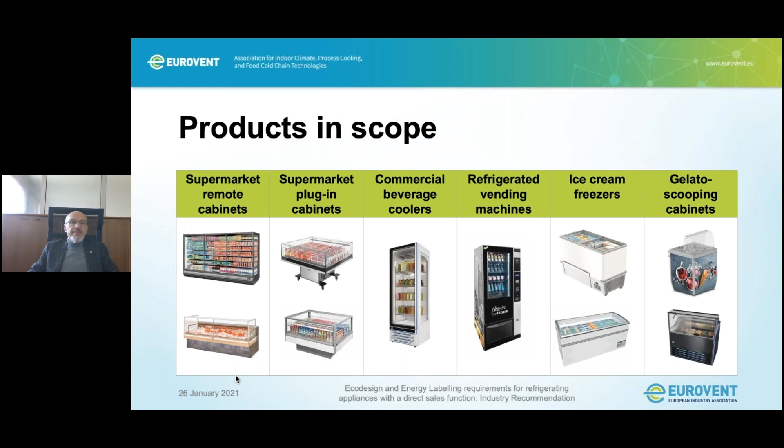How did we come to the requirements? The regulatory process period was very, very long, starting in 2005, so 16 years ago. Since the beginning and during all this long period, this product group has always actively supported the European Commission and its consultants, during the preparatory study that started with product environmental impact analysis and concluded with the proposed energy saving targets. Energy saving, because the main impact for such products is given by the energy consumption during the using phase.

Finally, at the end of 2019, on 5th of December, the two regulations were published. So we had more or less one year of time to align our products to these regulations that will come into effect on 1st of March of this year.

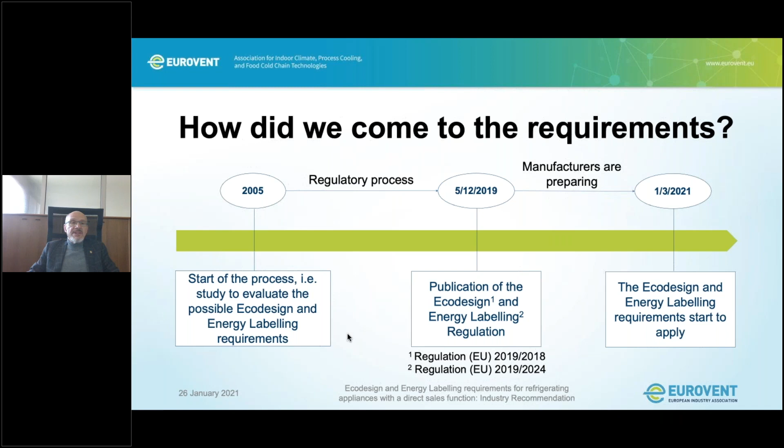Eurovent and its members deem an unambiguous interpretation of the requirements set out in this regulation of fundamental importance. Furthermore, such guidelines could be helpful as industry input for future European Commission guidelines accompanying the regulation. That is what we aim to provide with our recommendation, and this is what you will learn today. So let's start, and please, Francesco, go forward.

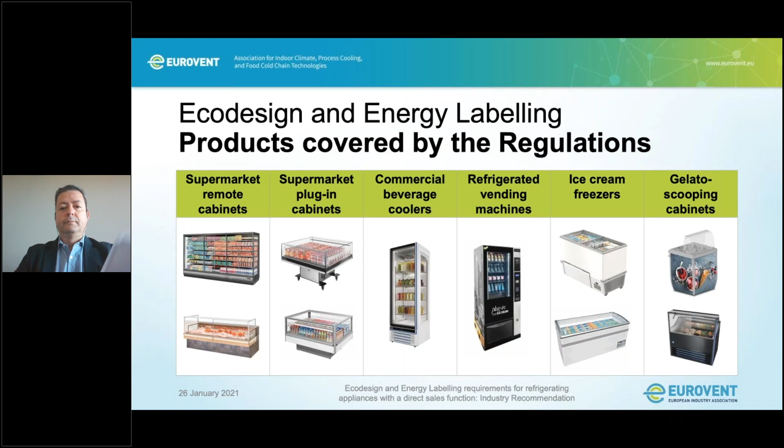The energy labeling and eco-design regulations establish the general rules, principles for refrigerating appliances with direct sales function. Ecodesign states minimum mandatory energy efficiency requirements for the products that will circulate in the European market and their ecological performance. The energy labeling scheme, on the other hand, will highlight the product's energy efficiency and the annual energy consumption with the energy label, with the technical documentation, and with the product information.

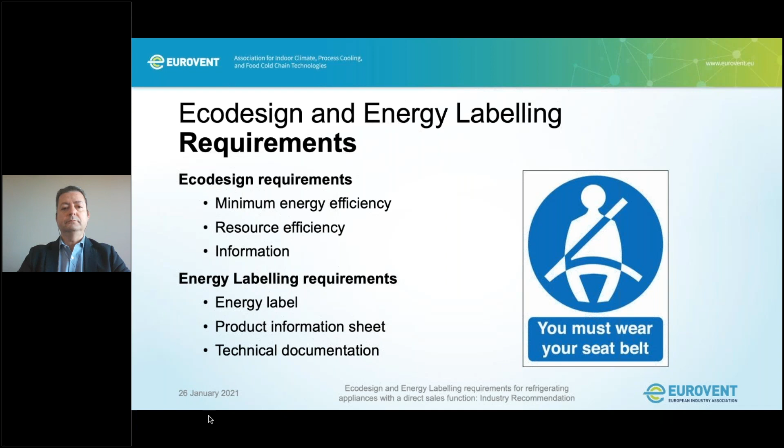The key parameter that determines the compliance and rates the energy performance of the product is the energy efficiency index. This index is the percent index that expresses the annual energy consumption of the product versus the market standard, namely the standard annual energy consumption of that product category.

Each model has its own index that depends on the product model and in a particular configuration, size, geometry, accessories, variants, and so on. Besides Y, the parameter Y, which is the total display area or the internal volume of the product, the other parameters you see, M, N, P, C, are parameters set in the regulation that are required to adapt the general formula to many different product types.

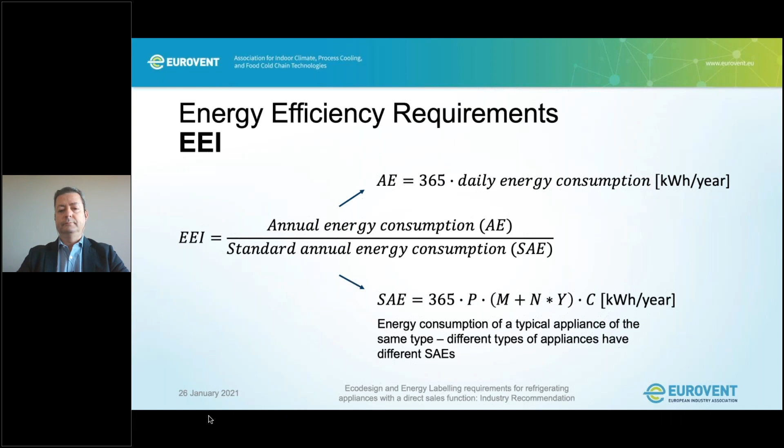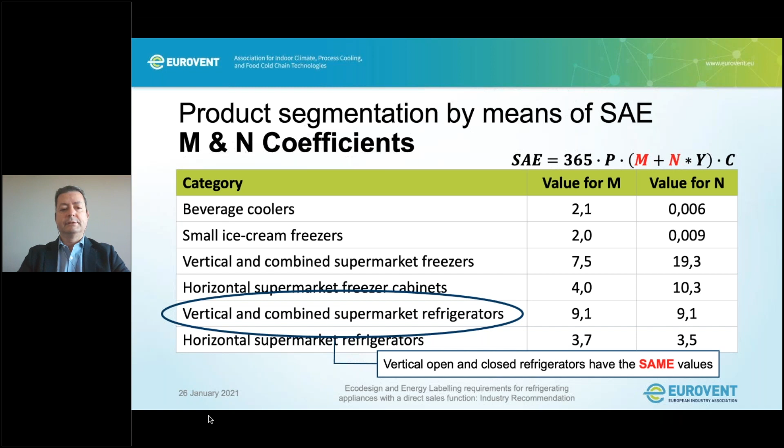M and N are product type parameters. Please notice that vertical, open, and closed refrigerators have the same values to highlight the very different energy efficiency performance of these products. The same applies for vertical and combined supermarket freezers, which have the same M and N parameters.

Looking at the C parameter, this is the product temperature class segmentation parameter. In particular, 3M0 parameters have been introduced with an amendment proposed by Eurovent Association.

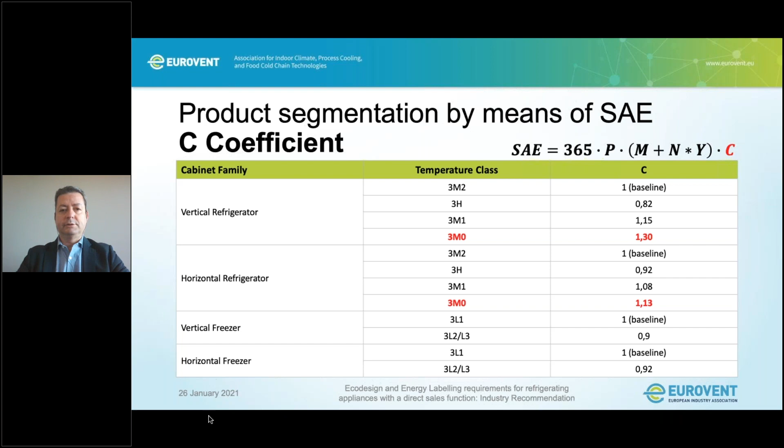Finally, P is the product plug-in or remote segmentation, which is 1 for remote cabinets and 1.1 for plug-in cabinets. For semi-plug-in cabinets, so water loop systems, the right parameter is going to be 1.

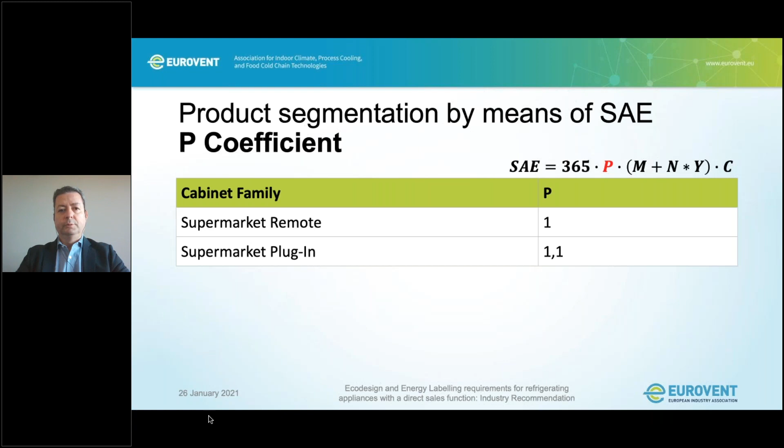As you can see here, the energy efficiency index decides if a product can be sold in the European market or not. In fact, all the refrigeration appliances with direct sales function must have an index below 100 on March 1st this year and below 80 just two years later in September 2023, except for ice cream freezers that will have to be below 80 and then below 50 in September 2023.

These limits apply on products when they're placed on the European market for the first time by the manufacturer or the importer after March 1st this year. Products that do not comply with these limits will be banned, will be prohibited from the European market.

However, products already in the warehouse of dealers, that have been placed in the market by the original manufacturer before March 1st and are now in the warehouse of dealers, can of course also be sold afterwards.

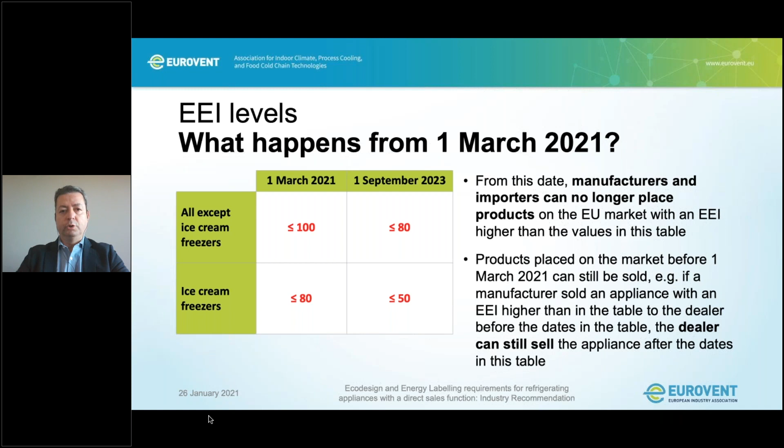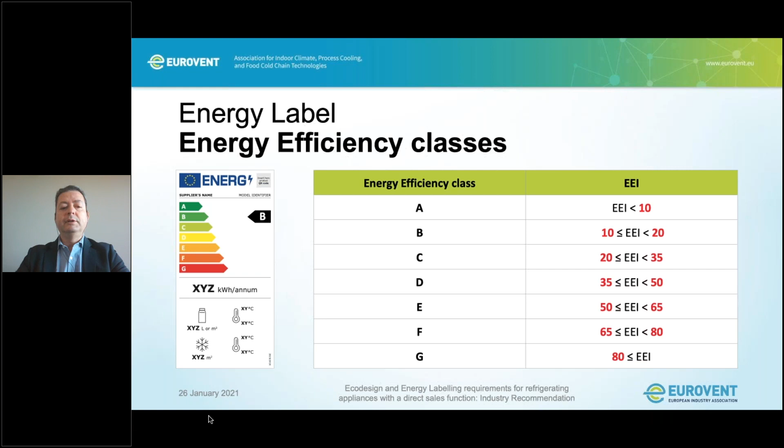As you can see here, the energy efficiency index is also used to decide the energy rating of the product. The end user can finally compare products that apparently look identical, but have very different energy and functional performances. Manufacturers, on the other hand, have now a tool to prove that their products perform better than their competitors. And globally, there is an increase in the average efficiency of the products sold in the European market.

But now, let's have a closer look at the energy labels foreseen for commercial display cabinets, which will be for 3 types.

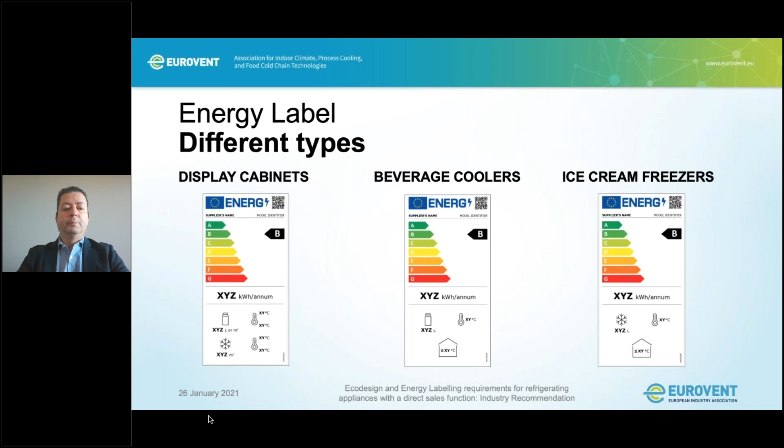The energy label for our supermarket cabinets indicates, first of all, the energy efficiency class in different colors ranging from A to G, from better to worse products. The annual energy consumption expressed in kilowatt-hour per year, and then a few additional informations on the second half and the lower part of the energy label.

We have, for example, the TDA of the product, the total display area surface of the product, and the product temperature on the right side. A product which is M1, we will write -1 + 5, for example.

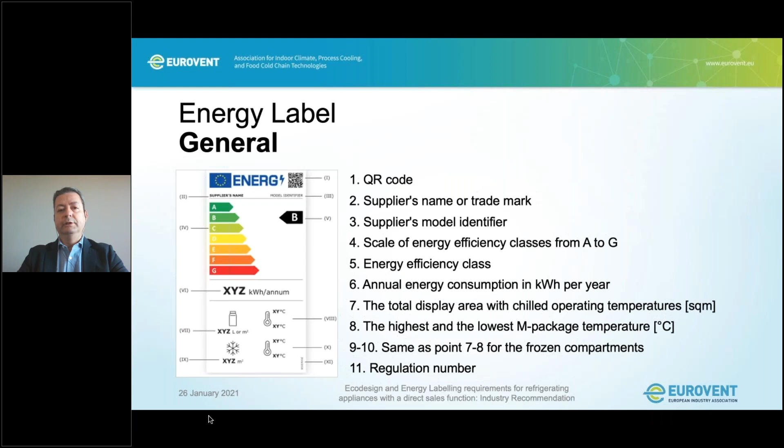The displayed energy consumption tells you how much electricity the product uses in kilowatt hours per year and allows you to compare different models precisely. The lower the figure, the less energy it will use, so saving your money on energy bills. However, actual savings will of course depend on the use you make of the product and how much you pay for your electricity.

In the initial scenario, the A class will be empty due to the extremely high efficiency limits intentionally set by the European Commission. Over time, the A class will be populated with new and better products. In B class, we may find the very best ice cream freezers now.

However, different from other product categories where the energy labeling scheme has been in place for many years, those who buy a commercial display cabinet class C in 2021 should be aware that they are buying the best in its class. In future, innovation will introduce new A and B products available for purchase, pulling the market up. It is very important to explain this concept well, to give our clients the idea of the real value of the products they'll buy.

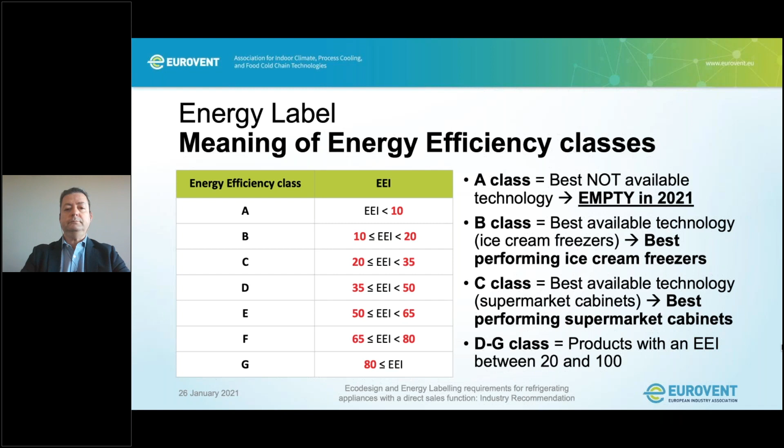So what happens and what changes from March 1st, 2021? If you're a manufacturer, an authorized representative, or an importer in the EU, you need to make sure the energy label is clearly displayed at the point of sale, showrooms, trade fairs, and so on, and that the energy efficiency rating appears on all promotional materials, online sale platforms, commercial offers, and any other marketing document, and of course it must be shipped with the product.

As of March 2021, suppliers—manufacturers, importers, and authorized representatives in the EU—need to register their products in EPREL before placing them on the European market. EPREL is the European Product Register for Energy Labelling. Customers, as well as market surveillance authorities and the Commission, will find all products circulating in the European market registered in EPREL without exception.

There will be two parts in EPREL. One is confidential, where manufacturers will place their test reports, for instance, and one will be the public part. Everyone can access the public part without restriction; you just need to register yourself as a user to enter and see the information. The information in EPREL remains visible until 8 years after the product is phased out from the market. With EPREL, clients will have more information than ever to compare and wisely decide which are the most efficient products for their stores.

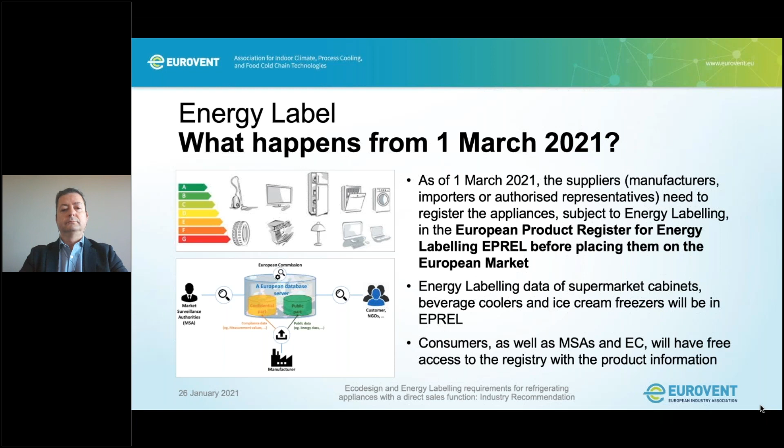The regulations precisely state which products are in scope and which are out of scope. As you can easily understand, the effectiveness of these energy measures directly depends on coverage, and it is essential that all products sold in the European market are labeled. But are really all refrigeration appliances for direct sales function going to be labeled? The answer is nearly yes. In fact, there are exclusions, but they are very limited.

On the left side of the screen are the exclusions from the obligation of energy labeling coming directly from the regulation. For example: saladettes, horizontal serve-over counters with integrated storage designed to work at chilled operating temperatures, corner cabinets, vending machines for frozen food, serve-over fish counters with flaked ice, and refrigeration cabinets for the sale of live foodstuffs like living fish, shellfish, and so on. These are exclusions from labeling foreseen in the regulation.

On the right part, you have the exclusions introduced by the Eurovent document interpretation guide—additional exclusions introduced by Eurovent. These are backwall cabinets, provided they have integrated refrigerated storage; fruit, vegetable, and meat cabinets using high humidification systems; curved cabinets; and carousel cabinets.

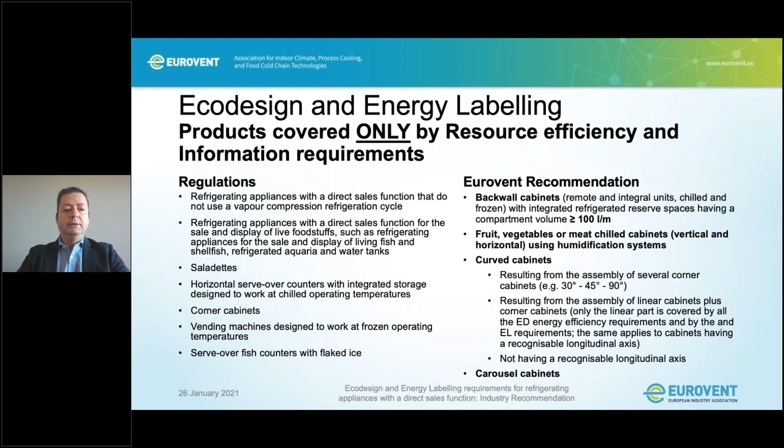Now let me turn the page for a moment and introduce the new concept of circular economy. The circular economy model is essential in the frame of the European Green Deal, whose final goal is to reduce greenhouse gas emissions to become climate neutral in 2050. Circular economy is the opposite of the traditional linear model: take, use, dispose.

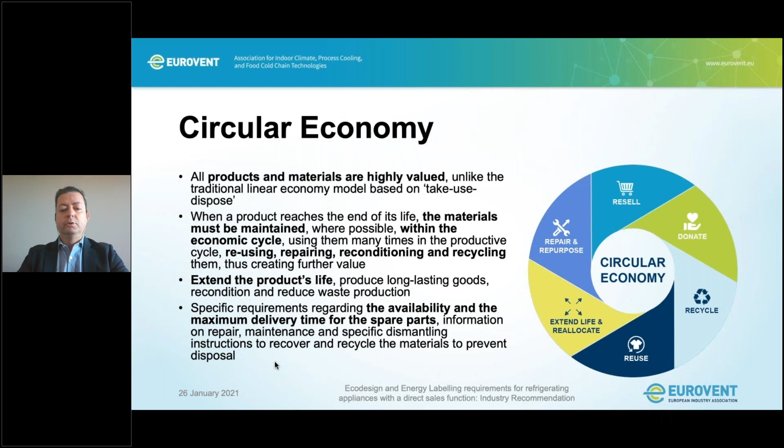All products and materials are highly valued. They must be used many times in the productive cycle—reusing products, repairing, reconditioning, and recycling them, thus creating further value. The point here is to extend the product's life. This results in specific requirements regarding the availability and maximum delivery time for spare parts, information for repair and maintenance, and specific dismantling instructions to recover and recycle materials, preventing disposal.

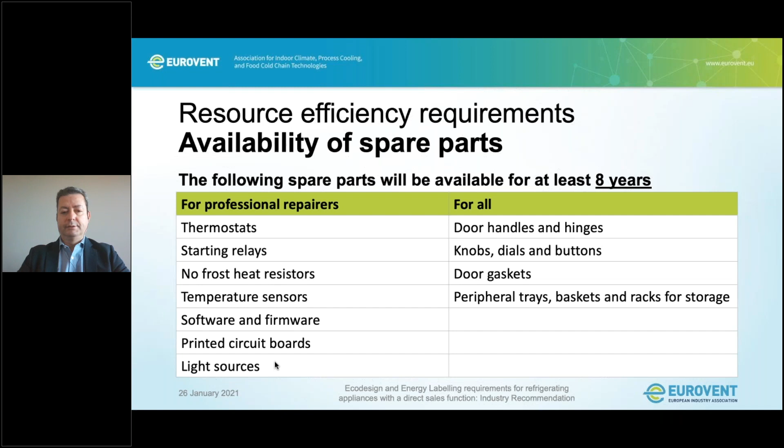Spare parts, for instance, need to be largely available for at least 8 years. Repair and maintenance information, instructions, and schemes must be available for professional repairers.

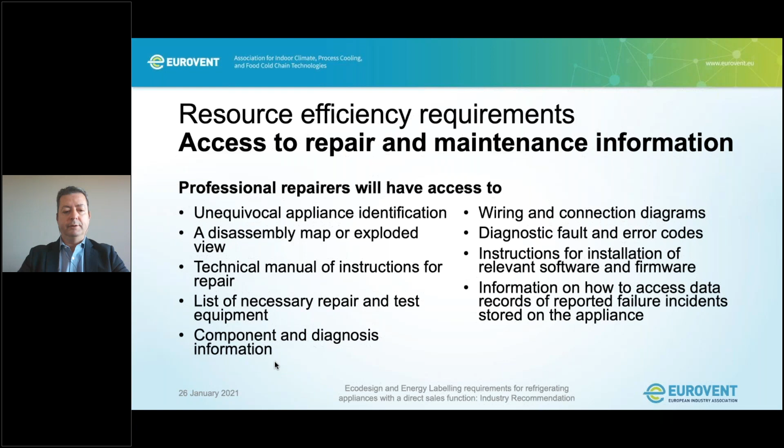Finally, specific dismantling instructions must be available to recover and recycle all materials. All these are no longer just good practices, but specific requirements of the Ecodesign law and obligations for manufacturers.

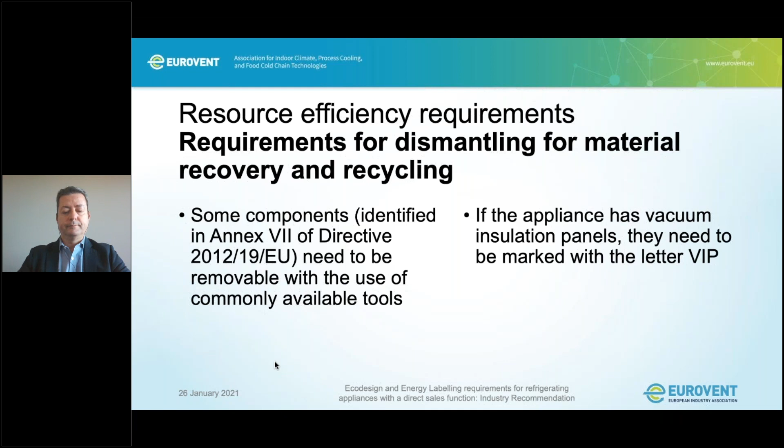Finally, the key takeaways are that from March 1st this year, there will be minimum efficiency and environmental performance requirements in Europe, and every product will be judged for its energy efficiency, which will appear every time it is presented or delivered.

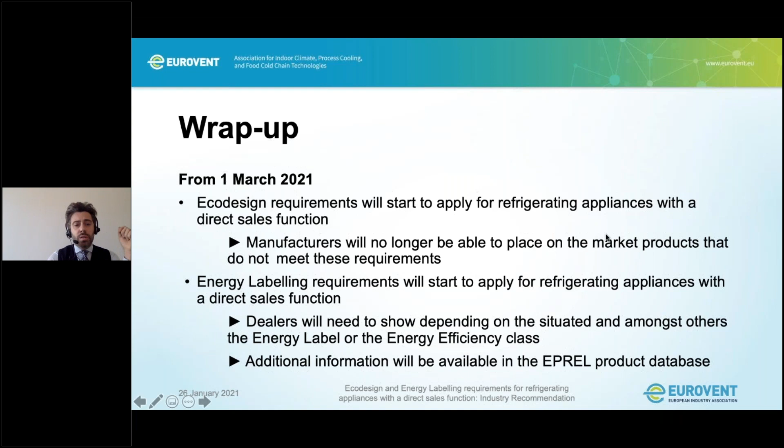Thank you, Francesco, and good afternoon to everybody. I will elaborate on the reference models and extrapolation rules.

Refrigerated display cabinets are offered in a huge variety on the market, and as just explained, they all have to be covered. So in order to cover this variety of models, in the recommendation we have introduced the concept of reference model and deducted model. A reference model can be considered representative for a group of cabinets, and for this group, the energy consumption can be deducted from the reference model.

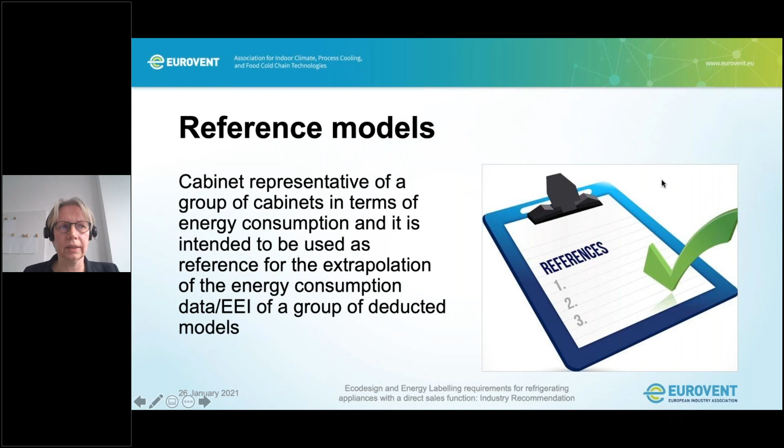The characteristics of a cabinet can be distinguished in two groups: those intrinsic to the cabinet design, like the geometry and refrigeration components, and those more flexible, often by customer choice, like the shelves and lighting. For this part, the recommendation proposes a standard configuration that results in the highest energy efficiency index for this kind of cabinet, and is intended to be used for the reference model, but also to ease comparison between cabinets and to standardize the entry into the extrapolation method.

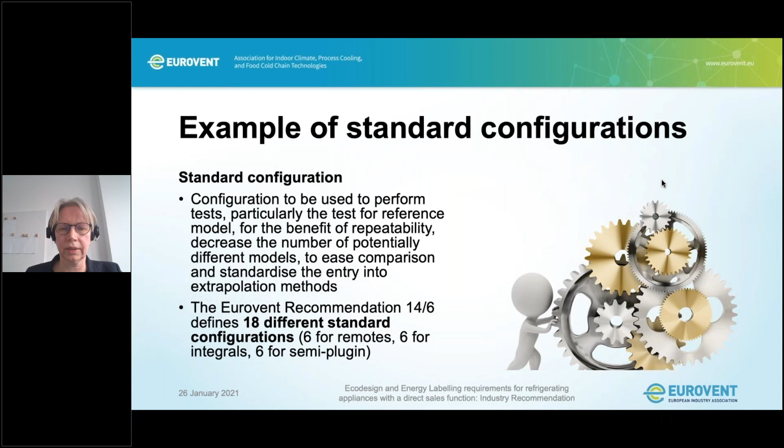In total, 18 different standard configurations have been defined, 6 each for remote, for integral, and for semi-plug-in. I will now explain 3 different examples of this standard configuration.

First is for remote vertical or semi-vertical open refrigerator. Common to all of these is that the reference length is always 2.50 meters. The number of shelf rows is declared depending on the front opening height, so around every 300 millimeters, one shelf. If the cabinet is available with under-shelf lighting, the reference model has also been tested and the data provided with under-shelf lighting.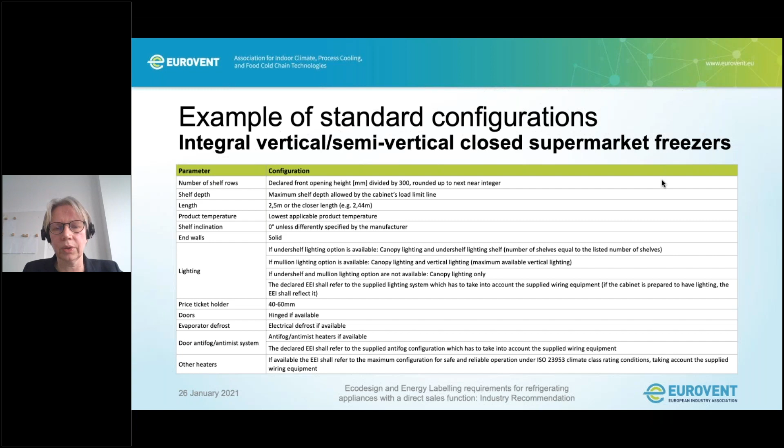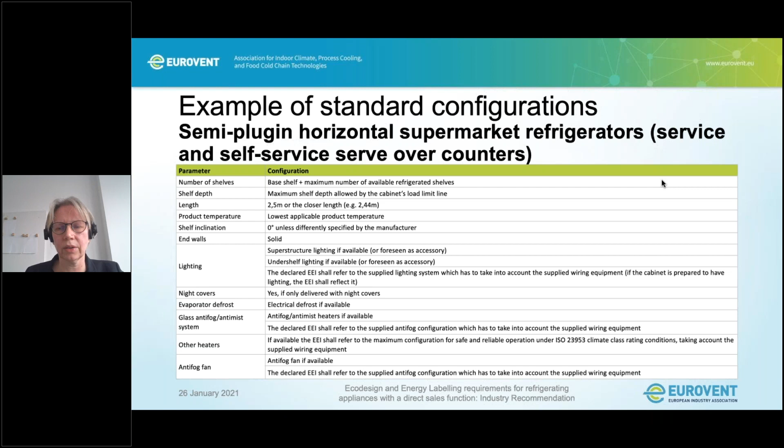Just for completeness, another example is a semi-plug-in horizontal supermarket refrigerator, which follows the same concept. Length is 2.50 meters, and all lighting available as an option for this cabinet has to be included in this reference cabinet. This concludes the part on standard configuration.

When we look at the characteristics that are intrinsic to design, the Eurovent recommendation provides a set of extrapolation rules for the energy consumption of cabinets that deviate from the reference model in length, height, or depth. These extrapolation rules are based on the statistical evaluation used to determine the formulas for the standard annual energy consumption that were explained before and that are part of the regulation.

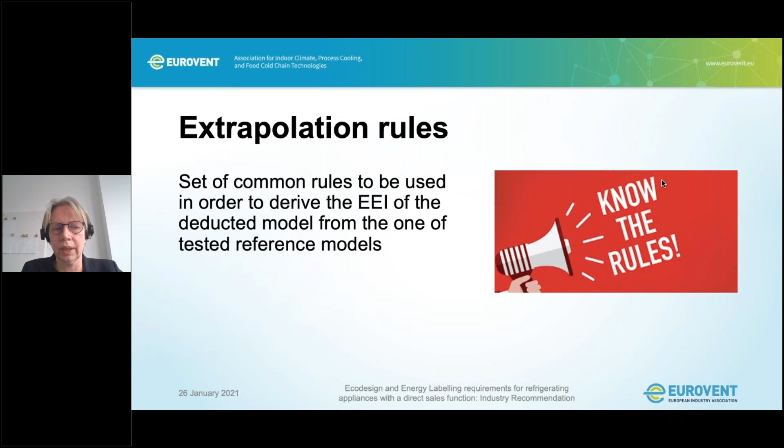First, I will explain the rules for the remote cabinet and then explain the differences for the integral and semi-plug-in. Most common for remote cabinets is that they are available in different lengths. The assumption is that for the same cabinet in the same temperature class that just deviates in length, the energy efficiency of the 2.50 meter cabinet can be assumed equal to other lengths of this cabinet.

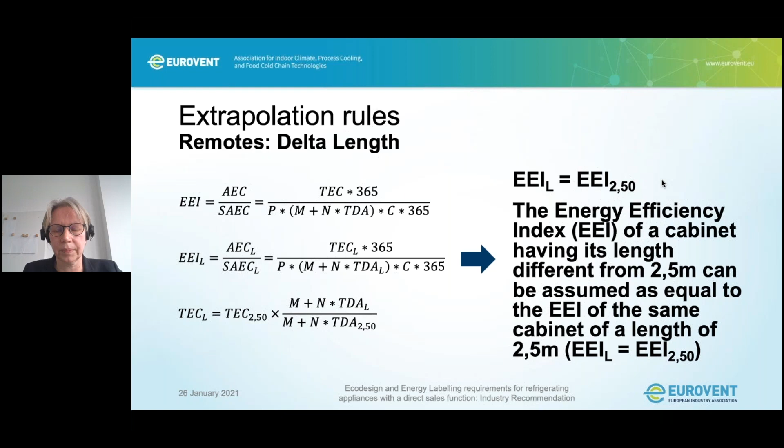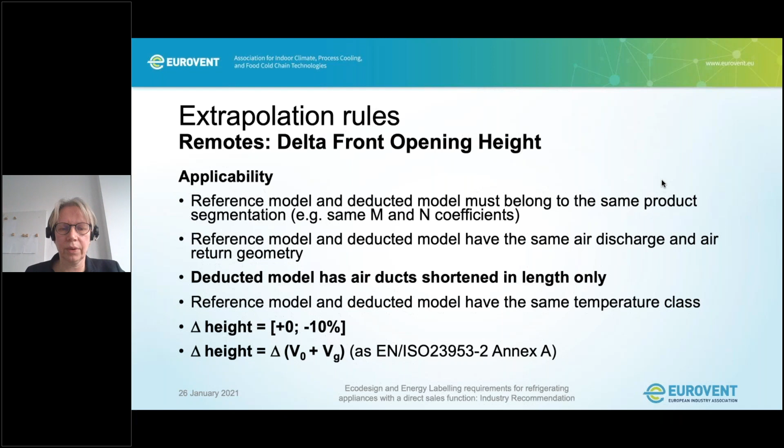For the front opening height, if the cabinet is smaller by about 10%, it can be assumed that if the cabinet is of the same temperature class, the basic geometry stays the same. So mainly just the air ducts are shortened in length. It can also be assumed that the EEI stays the same as for the reference cabinet, which is the higher cabinet.

This just applies if the cabinet is reduced in depth by not more than 30%. It can be assumed that the energy consumption of the cabinet stays the same, so it's not the EEI, it's really the energy consumption of the cabinet. This is a conservative approach, but normally it can be assumed that the highest impact on energy consumption comes from the front opening, which stays the same in this example.

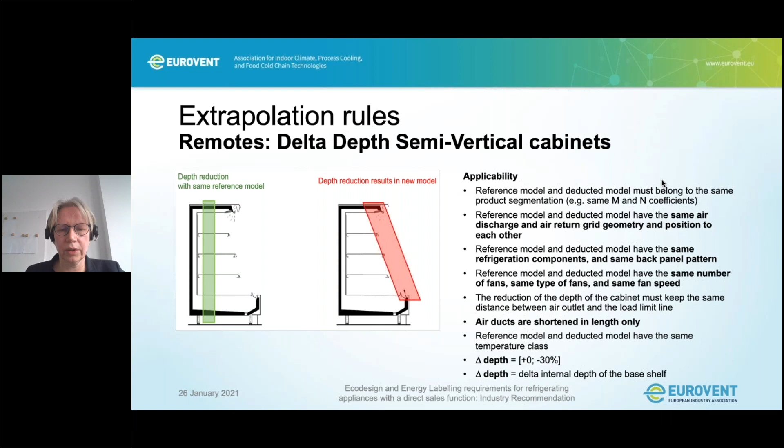For the sake of completeness, as also mentioned, the same rules apply also for semi-vertical cabinets. So the red area is not allowed to be changed, as you see in the picture on the right.

If you take the reference model of 2.50 m that has 2 refrigeration circuits, from this cabinet, the length 1.25 m with one of these identical refrigeration circuits can be extrapolated, and also the length 3.75 m with 3 of these refrigeration circuits. If these conditions are fulfilled, the same rules for the extrapolation of the length can be applied as for the remote cabinet.

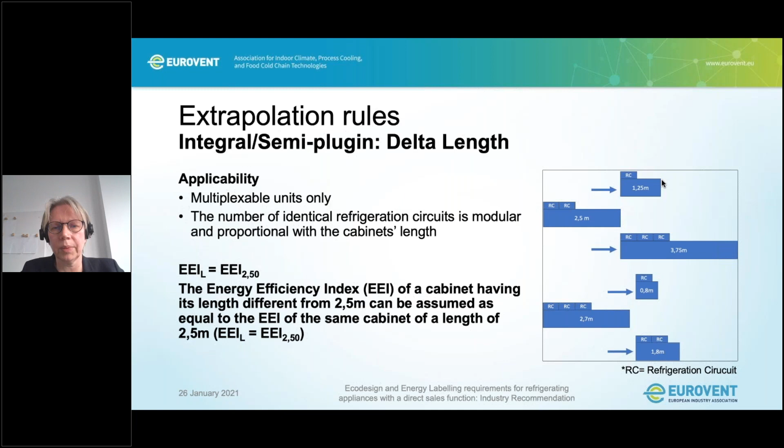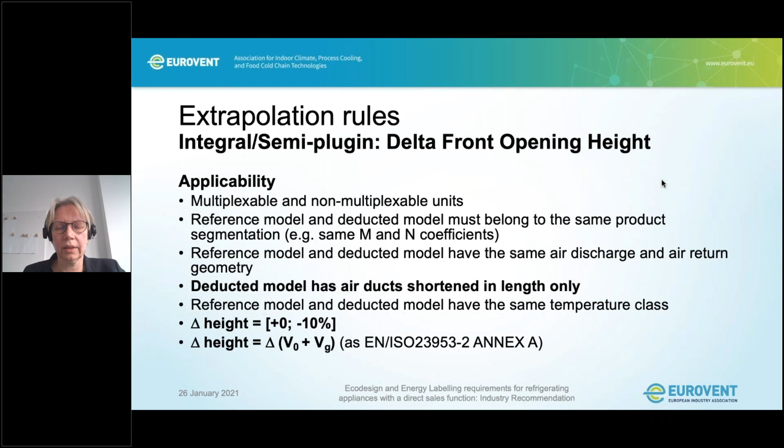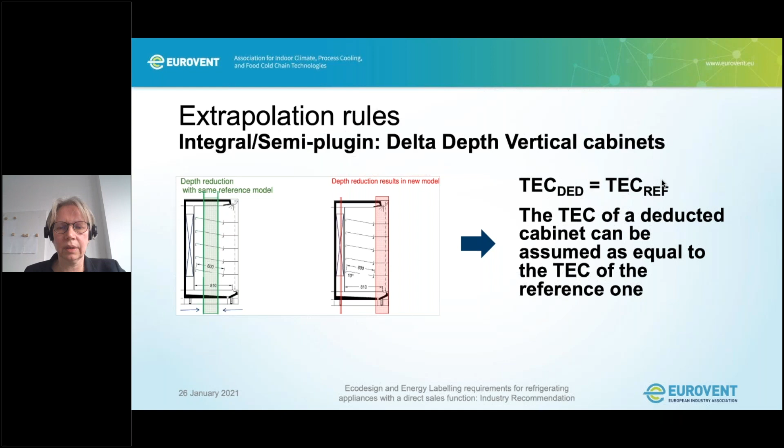Just for the sake of completeness, also mentioned here are the rules for front opening height and depth, which are the same as for the remote cabinet, so I will just briefly show them here. This concludes this part of the session. Thank you for your attention, and I hand back to Francesco Scuderi.

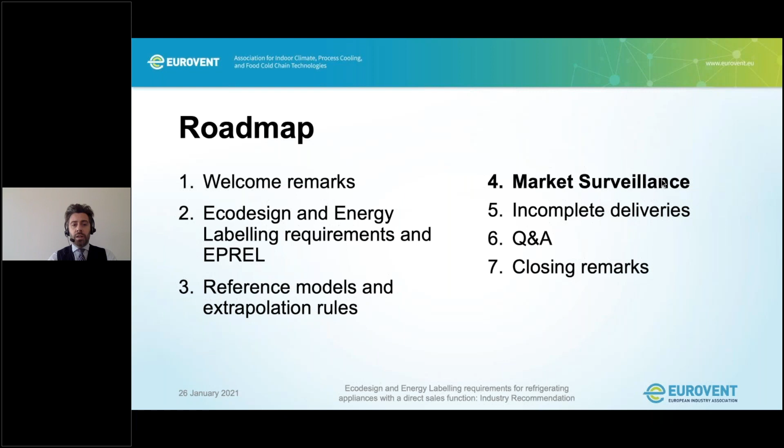Okay, Ines, thanks a lot for clarifying what are the extrapolation rules according to the Eurovent recommendation, and also for stressing that within the recommendation we have defined 18 different reference models. So my suggestion is for those interested to download our freely available recommendation so that you can have a clear overview and understanding of the discussed and agreed reference models.

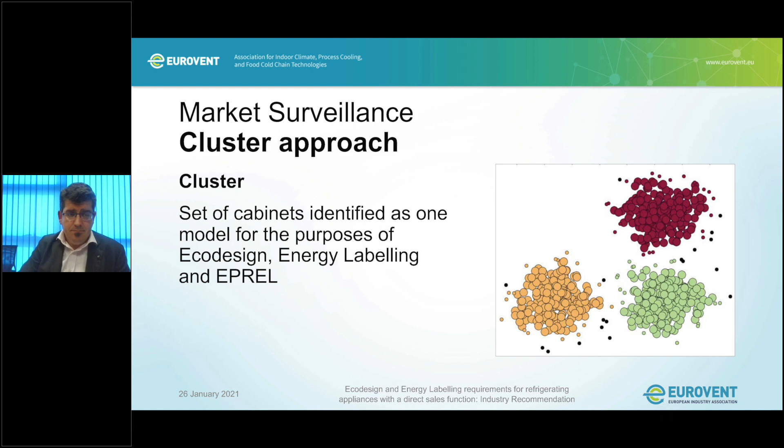Manufacturers might want to group different models into one model, which is representative of the highest energy efficiency index, the worst case of the listed family. It's the manufacturer's decision if and how to use the cluster approach.

Market surveillance authorities can access EPREL data related to the mother-model and make use of them for assessing the product under evaluation. Reasons to use the cluster approach: it benefits repeatability, decreases the number of potential different models, and allows easy comparison. We must get used to comparing products according to their life cycle cost, not only due to the initial cost.

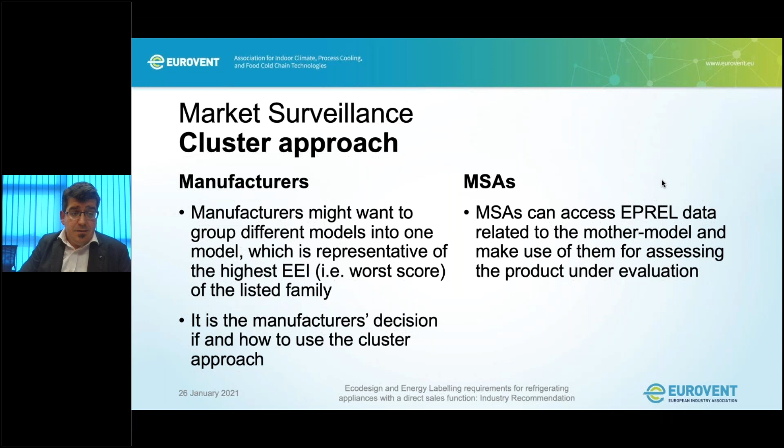Energy efficiency index will help. Eurovent interpretation presents a cluster proposal. Ines explained it before: reference model, standard configuration for testing and declaration. Now, one suggestion from Eurovent to market surveillance.

If a verification test has to be carried out due to a complaint or due to market surveillance on initiative, which product should be tested? Industry suggestion is 2.5 meter length or the closest length cabinet. The reason we propose this is that 2.5 meters is by far the most common module.

Industry carries out the test according to the 23953 standard. There was an agreement in the past at Eurovent to develop laboratories for 2.5 meter length cabinets, so there are no test capabilities available to carry out tests according to the relevant standard for cabinets longer than 2.5 meters. Finally, as Ines explained before about extrapolation rules, the energy efficiency index of a cabinet having a length different from 2.5 meters can be assumed as equal to the energy efficiency index of the same cabinet at a length of 2.5 meters.

Let's go to point 5. In this point, we will introduce the industry position about incomplete deliveries and how to deal with them.

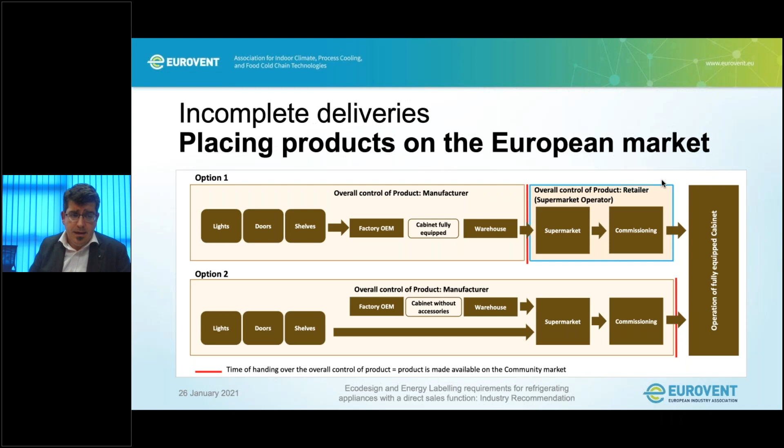Industry conclusions are: it's not possible to place on the market products which could meet the minimum requirements only at a later stage. Only the manufacturers of refrigerating appliances with direct sales functions can be responsible for their conformity with the Ecodesign and Energy Labelling regulations.

Take into account that the Energy Labelling Regulation defines in Article 3 the obligation of manufacturers to generate and transmit requirements concerning product declaration. It also defines in Article 4 the obligation of dealers, and in Article 5 the obligation of internet hosting platforms to ensure the transmission of information provided by manufacturers. If one dealer transforms a cabinet and generates information concerning product declaration, it becomes a manufacturer.

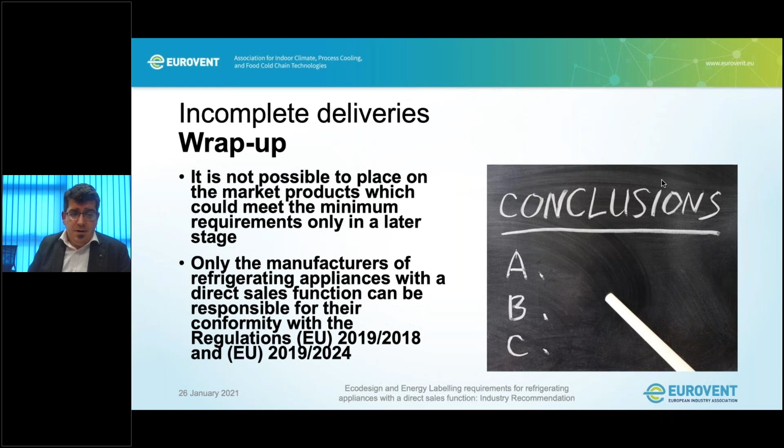Thank you very much for your attention, and I leave the floor to Francesco.

Daniel, thanks a lot for your part, for your speech. Very, very important what you stressed concerning the cooperation between the industry and the market surveillance authorities, and also what you clarified in terms of incomplete deliveries.